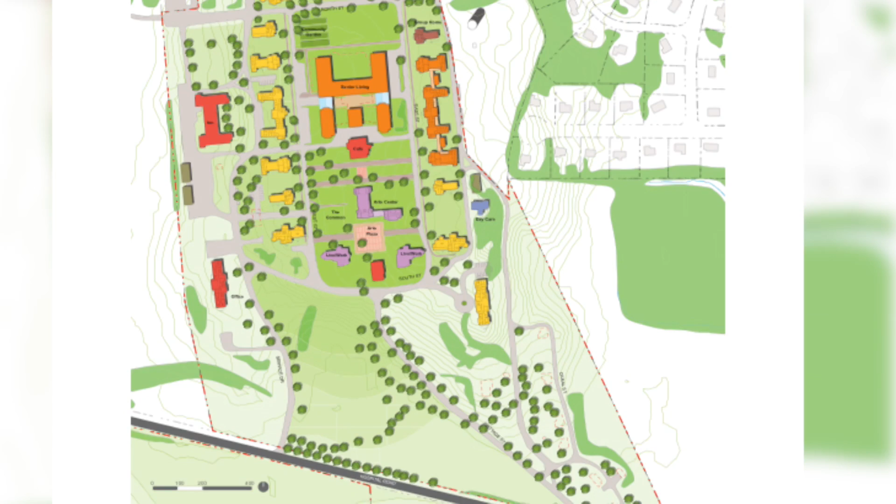We've set it up so small groups can give us feedback on a handful of concepts we're going to present tonight, and we're looking for whether they like those concepts in general. There's a couple of variations on the theme, and we'll look for what combinations of those two scenarios are most attractive to people. People also have the opportunity to bring up other ideas as well.

The hospital closed in 2003, and the town bought the property in 2014. The committee got formed shortly thereafter, and we've been going through a number of steps to gather feedback from the town. We did a number of open meetings and 3 big surveys, and then as recently as February, we had a workshop attended by about 450 people who came and looked at 4 radically different scenarios.

We tried to put together what we called the corner cases. One extreme was we would eliminate all the buildings and have a big park. Another extreme was very heavy development, and there were things sort of in the middle. Some scenarios were a big bang, doing all the development at once, and for others it was more phased development.

We got some pretty consistent feedback from that meeting, and we've narrowed the funnel, so to speak. The theme was that people are looking for a mixed development, community atmosphere, and a very strong desire to preserve the historical buildings. So all the scenarios that had to do with demolishing the buildings are pretty much out the window, and we're looking to retain as much of the original architecture as possible.

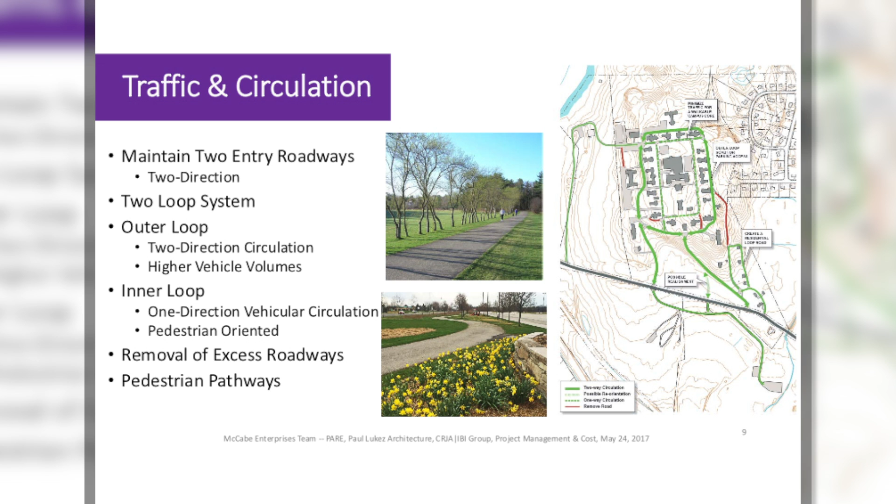And I'll let Jen talk about the two scenarios. Okay, great. So we have two scenarios that we've put together, and as Kathy mentioned, you're probably going to see that there's a lot of similar elements in both of them, but that's because we've been listening and seeing that there actually are things that are important, and we've tried to incorporate them in both.

The first one, we've separated the two with colors. One's blue, one's orange, and you'll see that when you get the packets handed out for your work sessions. I know it's probably hard to see some of the detail on these, so you'll be able to read that when you get the plans at your tables.

In the first option, we're calling this town square, because it takes and creates a very large open space in the center of the quad, right in the center of the main buildings. This is actually a really large open space, the size of almost 3 soccer fields.

It's achieved by taking out the one building that isn't historic in the middle. It's a fairly modern building that was probably built in the 50s or 60s, but it's not really relevant to historic preservation. So in this scheme, we're showing that all of the buildings surrounding the main campus are to be developed as apartments or residential uses.

The other feature in this core area, as part of this town square, is incorporating the use of the chapel and the infirmary for an art center, which is something that's been discussed before.

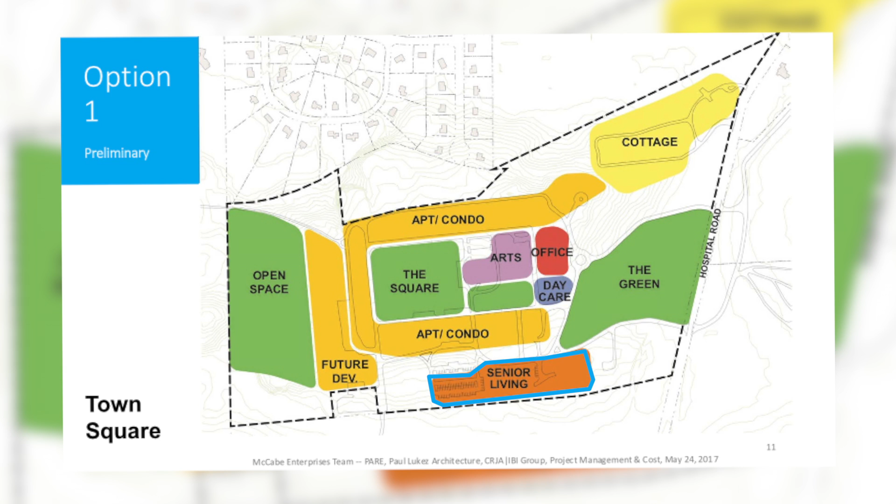If we go to the next slide, this is an image of how it would look. You'll be able to see this with the printouts at your tables, but here's an overview of how it would play out, with green space at the front from Hospital Road working its way into the large open green square in the center.

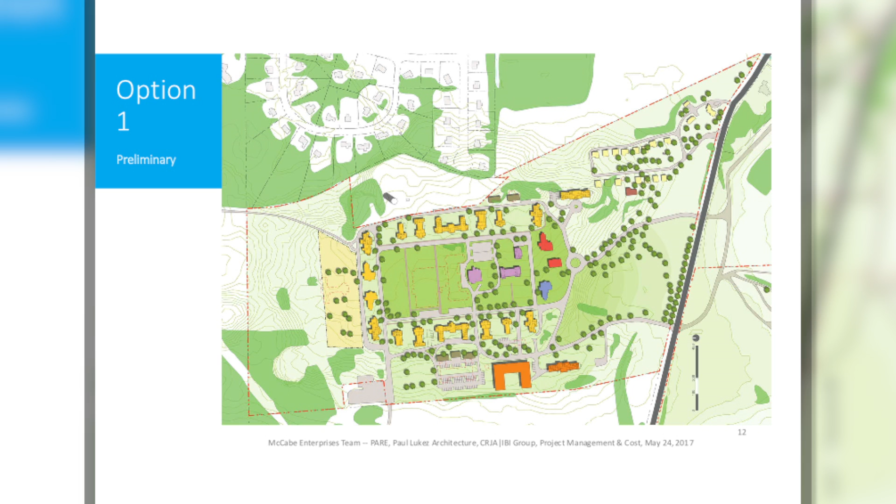If we look at the second scheme, we actually take the opposite approach and keep some of the buildings more densely in the actual core of the campus. We're calling this one the rural village.

You'll see the orange in the center, which is taking the senior living and putting it right in the center of the campus, so it's easily accessible to other uses like the arts center, which could be shown here as part of the chapel and the infirmary.

We're also showing some commercial development in the center, with perhaps a cafe and some offices, something that helps keep this an active center space that's really publicly accessible.

In this scheme, we took a slightly different approach to some of the open space, like up on the north side of the campus, shown on the left side of the drawing. We're suggesting this could be rented or leased out for agricultural use, something that would help preserve the character of what this was when the hospital was operating.

To that effect, down on the Hospital Road side, where we had small houses and cottages in the other scheme, here we're suggesting taking those away and creating an arboretum as public open space. There's a really wonderful tree collection there that should be preserved.

So this scenario keeps that open and focuses all the housing density up on the main campus itself. The last thing I'll point out is that on the west side, at the bottom of the page, we're showing potential commercial development, since this area is easily accessible from the road without conflicting with housing and residential uses.

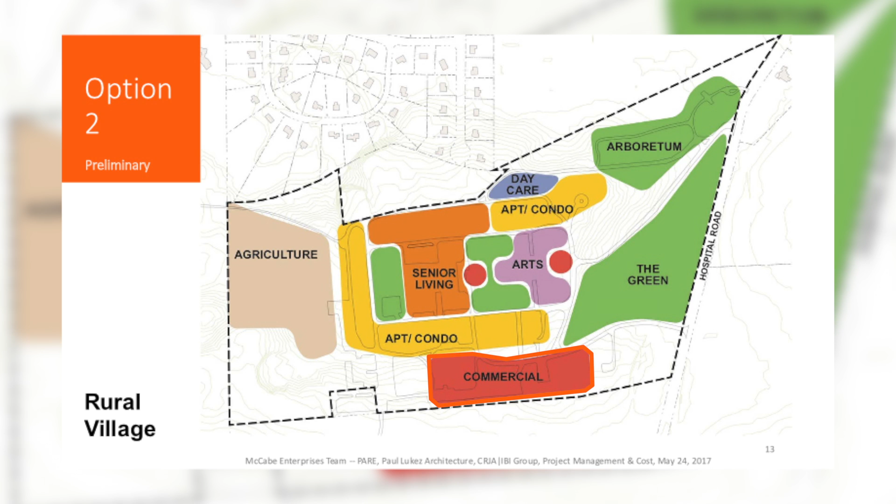The thought here is that, in some of the schemes you've gone through in the past, maybe there's an inn here with a restaurant function or entertainment hall for weddings and things like that, and also perhaps some office space.

If we turn to the next slide, this is another representation of that. You'll see the orange building in the center of the space, in the middle of the quad. In this case, what you're left with for green space is still larger than a soccer field, so it's not small or insignificant.

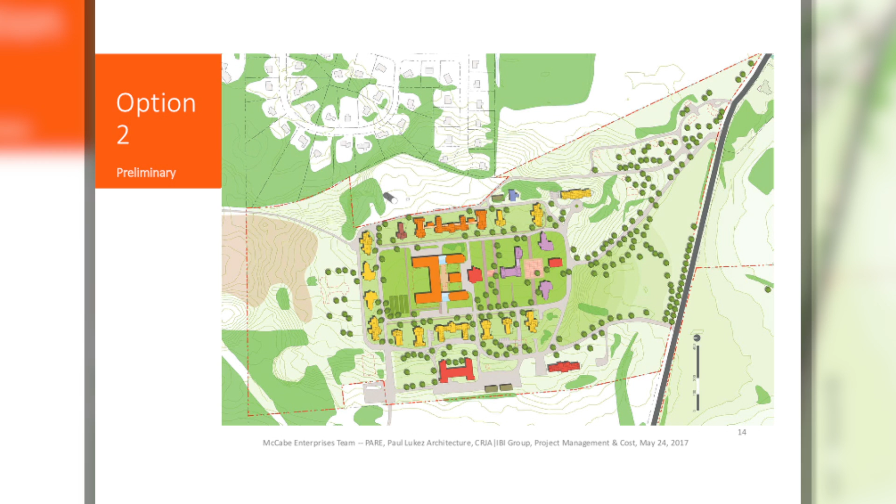Let me go to the next slide. I'll talk a little about the next piece of the site, the south side of Hospital Road. We're showing two different scenarios here. We've heard the desire from Parks and Recreation to have a facility on the south side of Hospital Road.

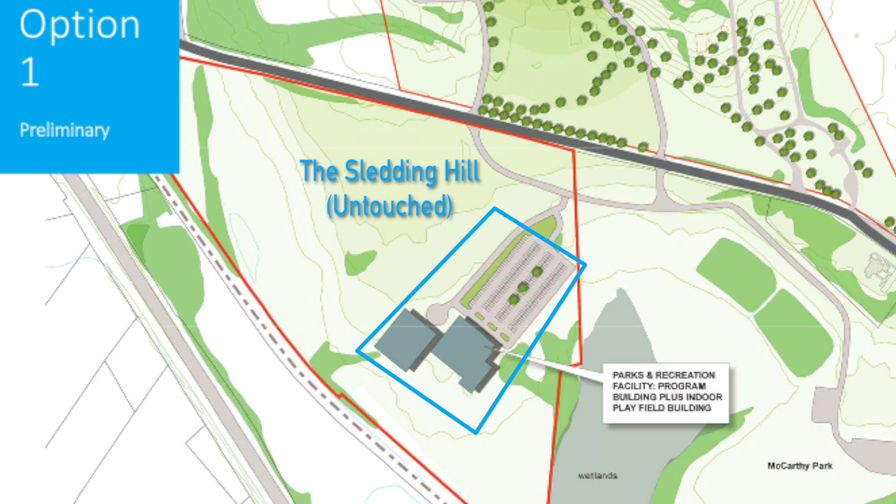This shows what their projected facility size is: a 26,000 square foot program space, and potential for an additional 30,000 square foot indoor recreation field. This represents about what the parking requirement would be for that size of facility.

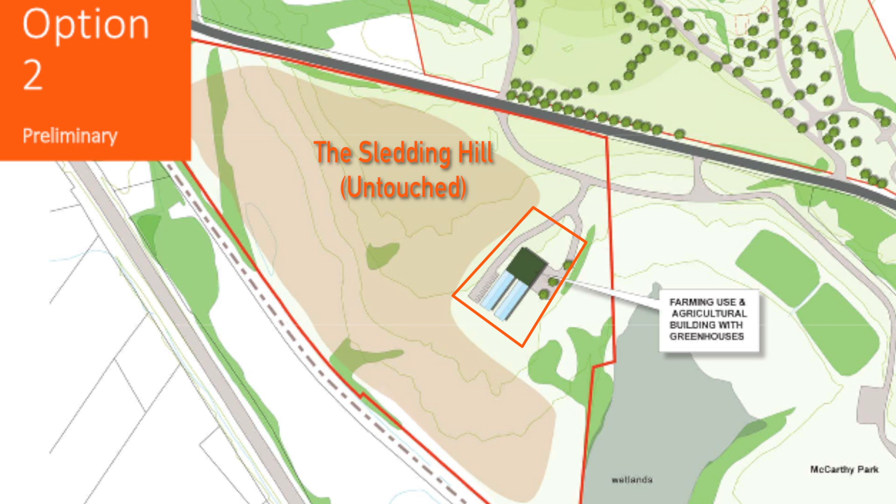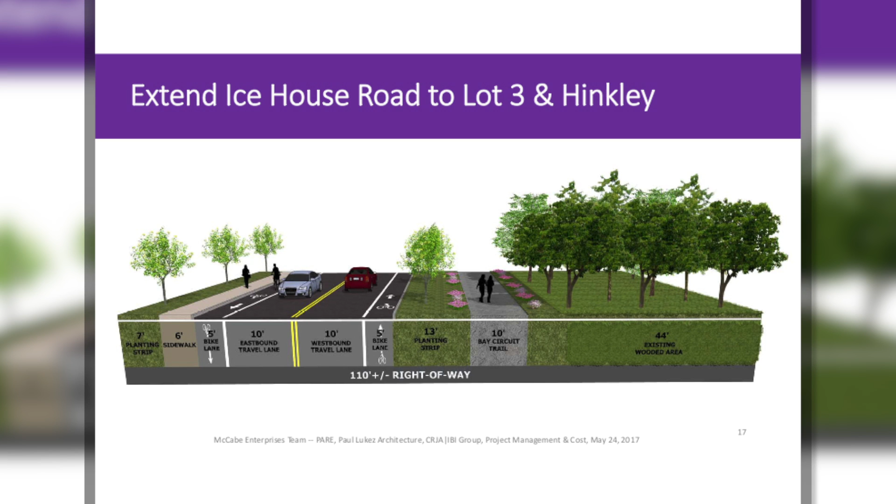Thank you, Jen. So I'd like to talk about Lot 3 and the Hinkley lot. In both cases, we're going to look at two scenarios, and in both cases, there's going to be an access road, Ice House Road, to provide better connection to the site. Next, please.

So here's Ice House Road. In order to improve access, we're going to improve the quality of the street and the experience. In this scenario, we're looking at senior housing, about 42 units, and then there will be a large parking lot completely covered in solar panels on Lot 3.

In this case, we're going to have conservation land preserved on the northeast corner, and access is provided by parking in front.

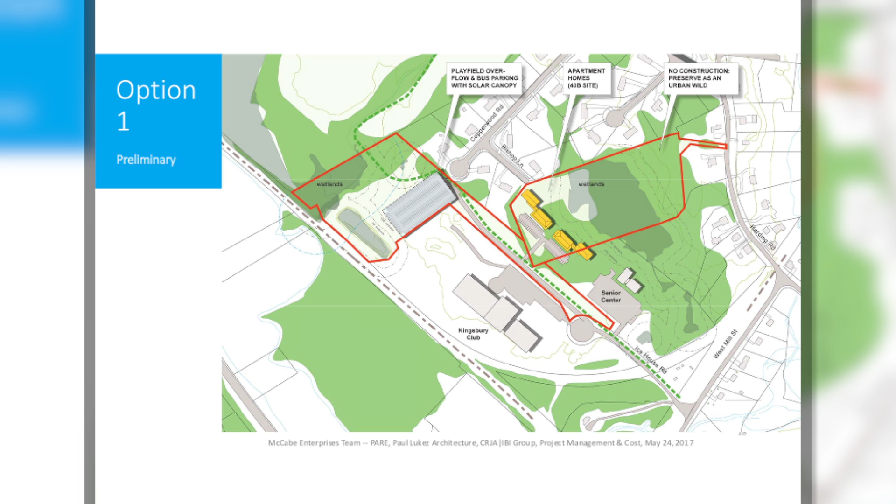In this scenario, we're reversing the relationship, so senior housing now goes to Lot 3, and we're introducing cottages on the Hinkley lot. The Hinkley lot would have 14 cottages, each about 1,600 square feet, and there would also be a site up in the northeast corner which could be developed and sold to a private developer.

Then the senior housing would move to lot number 3. That again would be 42 units. Next.

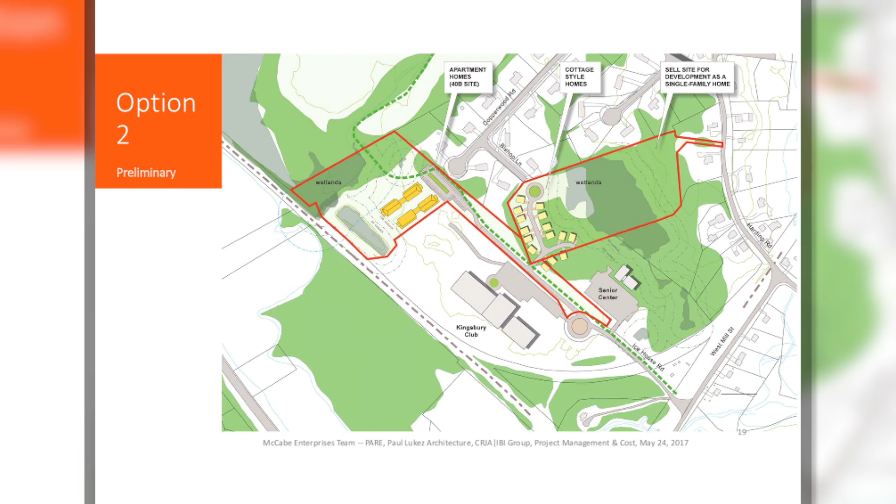So this is a brief breakdown of the utilities on site. As of right now, we do have water supply. However, during a max day demand situation, for example the summer, the amount of water available will become a challenge based on the permitting. Sewer, there's no infrastructure on site, so we need to revamp that system and incorporate that. Electric and gas are available with Eversource and Columbia Gas as the primary utility. And for telecommunications, we know that Xfinity is the major provider over here.

So for the water, as I mentioned, there will be some infrastructure changes. To actually extend and redo the piping on site would roughly cost $1.2 million. For the sewer, the proposed flow from the site would roughly be 120,000 gallons a day, which falls under the NPDES permitting for the wastewater treatment plant on site. That would cost $4.5 million for new piping and a pump station as well.

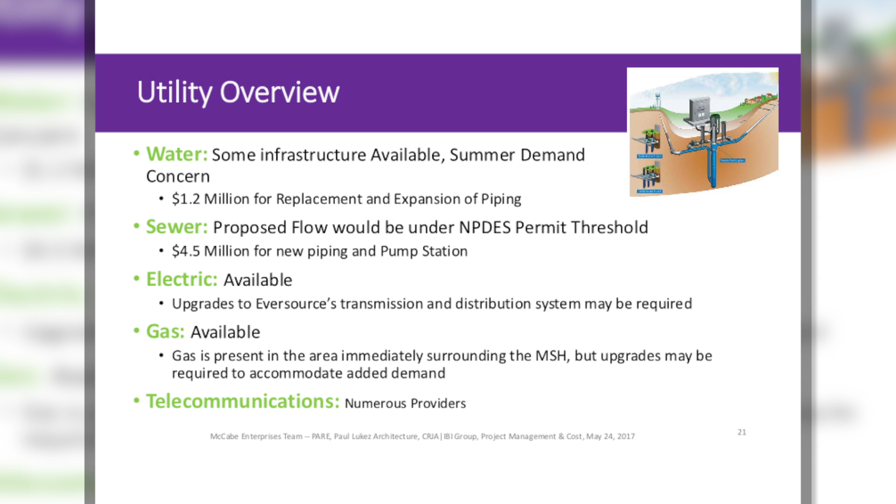As I mentioned, electric and gas are both available. However, upgrades may be necessary for the proposed development.

So housing has been a very hot topic in many of your minds. Scenario 1 has 268 units, which includes housing on the quad, housing on Lot 3, and housing on Hinkley. Scenario 2 has 291 units. Again, the proportion of market rate housing and affordable housing is about 30% affordable to 70% market rate.

The Lot 3 example and the Hinkley example that Paul talked about, with 42 units, that would give you a 2-year safe harbor with 40B. That's why we looked at 42 units. That also has a very positive cash flow.

We also, on the Hinkley cottages, could include senior single-family empty nester homes, which was at the request of the Senior Housing Committee, and that could include affordable units, but not all of them would be affordable. There'd be a mix. So we looked at and compared the housing mix.

Again, in scenario 1, about 70-75% of the housing would be open to any person who wants to lease or buy a unit. There's a mix of both owner-occupied, in terms of the small-scale cottages or single-family, whether that's on Hinkley or the southeast quadrant. Most all the other is rental, and let me tell you why we need rental.